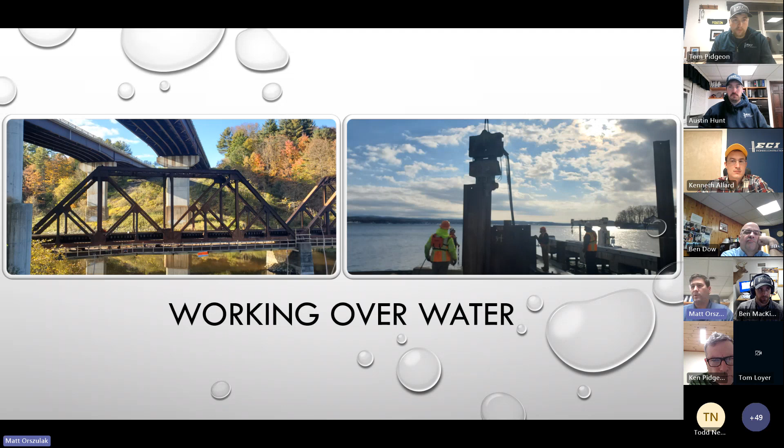So I just wanted to kind of highlight the standard, how we want to tackle that using our best practices and our ECI safety standards. So the biggest thing with working over water, what we're trying to avoid is that drowning hazard. That's one thing that we're definitely worried about, an employee drowning.

So kind of utilizing the hierarchy of controls that we mentioned about earlier, what we want to try to do is isolate people from the hazard. So setting up a guardrail system if we can, or using a personal fall arrest system. If we eliminate the fall, the drowning can't occur. So that's kind of how we want to work from the top down. We want to try to work that way if we can.

If we can't, then really what we need is to wear flotation devices. So if an employee lands in the water, they're going to be risen to the top. So for the winter work, we do have winter flotation jackets, especially for the crew up in Alburgh.

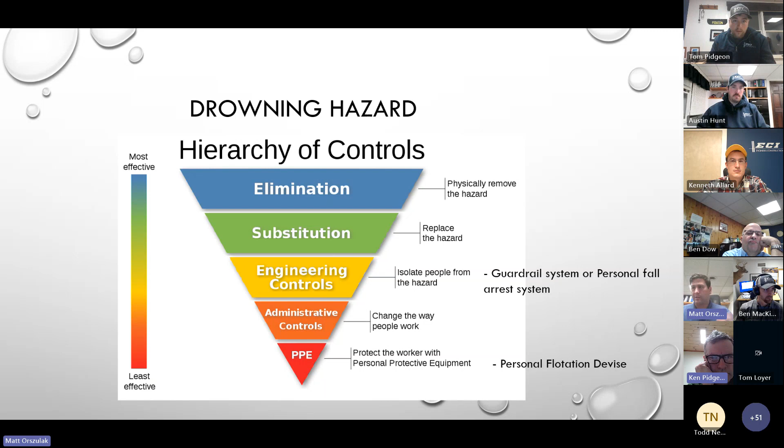They're utilizing those flotation devices. If more crews want to utilize those, please contact Health and Safety. We'll purchase more. So far, we're hearing good positive feedback from these devices. Let us know, and we're staying on top of it between all of our site visits. But that's kind of our standard for how we want to tackle the drowning hazard.

And then the last thing, this is a very quick standard to talk about, is to always have a rescue plan. So the standard says we need to have ring buoys with at least 90 feet of line shall be readily available, and then one life skiff shall be immediately available. So that's if someone does enter the water, how are we safely going to get them out.

Pretty cut and dry, pretty straightforward, but it's a good topic for us because we're doing a lot of this work right now.

Hey Matt, I recall maybe not all the exact details on that OSHA citation, but the guy wasn't really working. He just happened to be at the top of the slope, not even working on the slope itself, I don't believe, but one of those things where OSHA feels compelled to do something, even though it wasn't technically strictly within their regulations. And they didn't even fine us because they obviously didn't feel it was a real violation.

Yeah, but we still did need to be aware of that. Yeah, we spent a lot of energy fighting that one, so if we can avoid those confrontations with them, I think it's best practice if we can.

Yeah, so sometimes my point too is don't even give them the opportunity to appear to be in violation. Just make sure we're on the proper side with the proper PPE and everything, and avoid coming near those red lines, especially if OSHA's on site. Exactly.

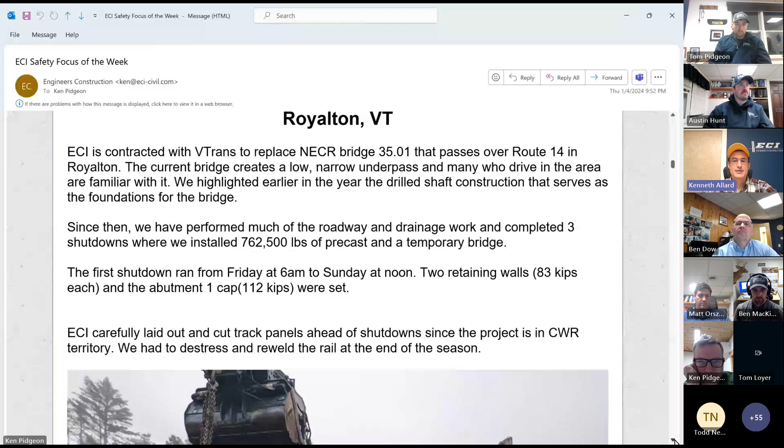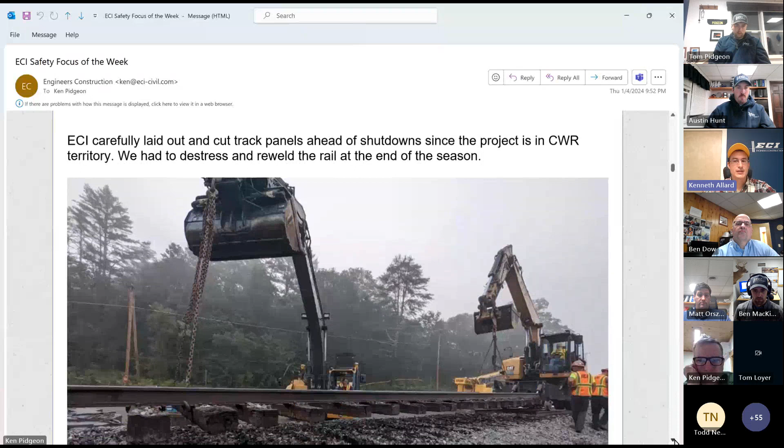We panelized the track. Since it's all CWR, we had to cut it, and when we were all done, de-stress and re-weld it at the end of the season. Here the guys are taking out a track panel for the first shutdown.

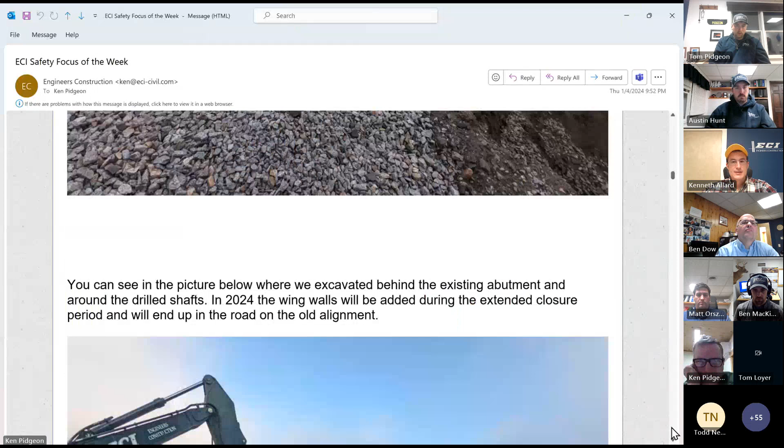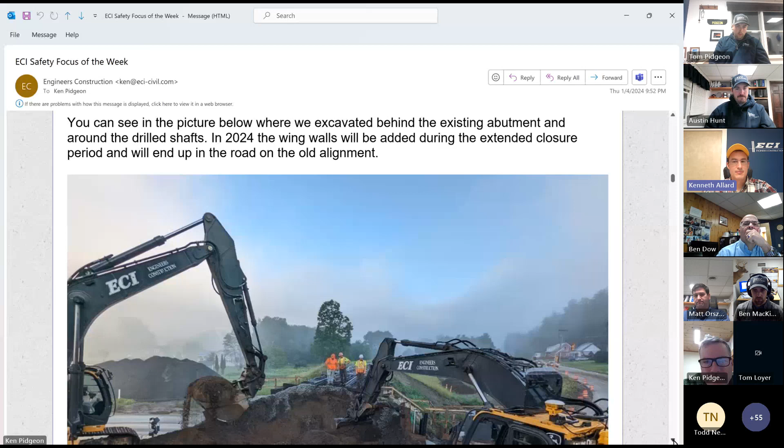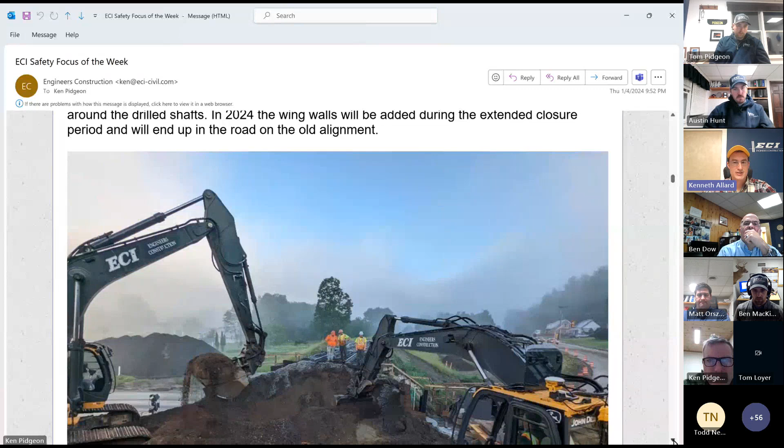The next picture here, we're just excavating behind the existing abutment and around the drilled shafts. In 2023, you'll see how the new abutment looks in these pictures, but in 2024, the rest of the wing walls will end up out in Route 14 where it exists now. So we couldn't do it all this year until the extended closure next year.

This is an incredibly tight S-turn on the existing alignment for the highway, and that's part of the problem there.

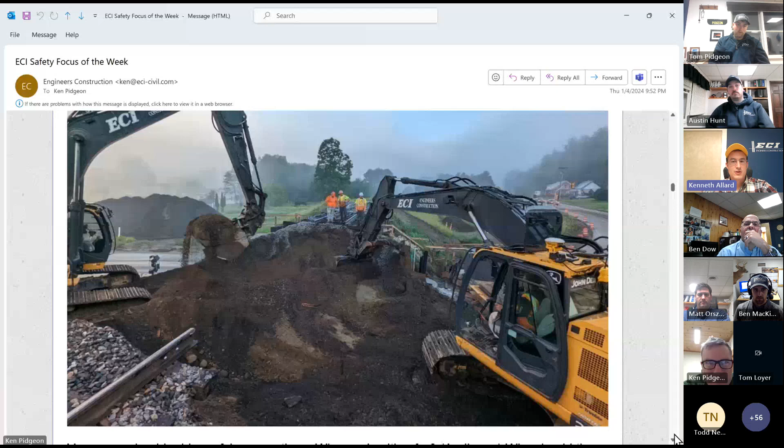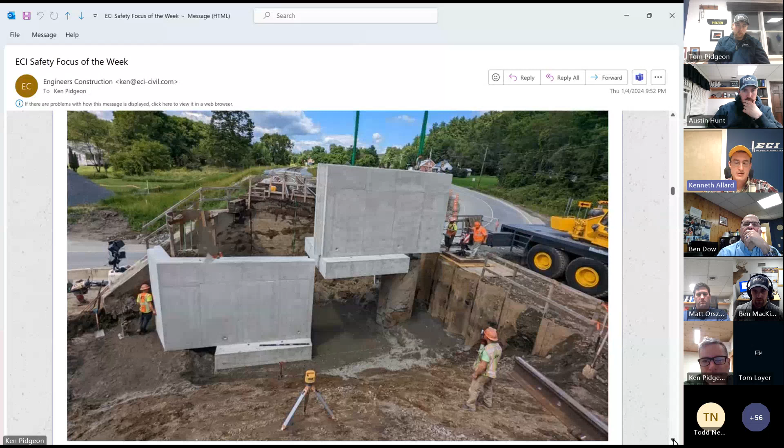The heavy pieces require getting CCS's crane, a 275-ton crane, as close as possible. The sheets on the right in this picture are there to get the crane close, but leave just enough room for the wing wall return. That wing wall in the air there, the footing wraps around the drilled shaft, and there's a return similar to the one on the left that wraps around the drilled shaft. So it's pretty tight. That outrigger pad is supported by 3 H-piles that are hidden, to keep the lateral load off the sheets in the deep section of the cut, which I think is about 10 feet.

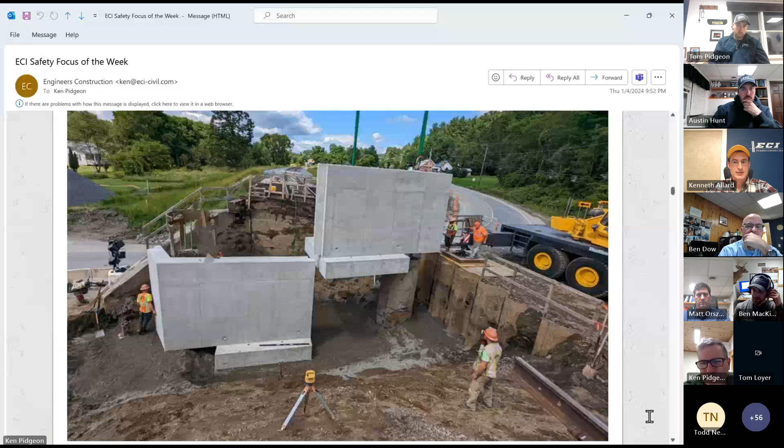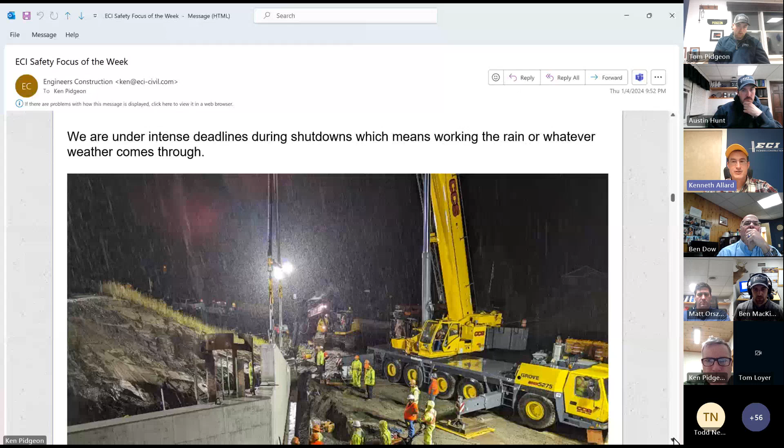Of course, in these shutdowns, we're under some pretty intense deadlines, so we're working rain or shine. Sometimes it rains in the middle of the night, but overall, I think we're lucky.

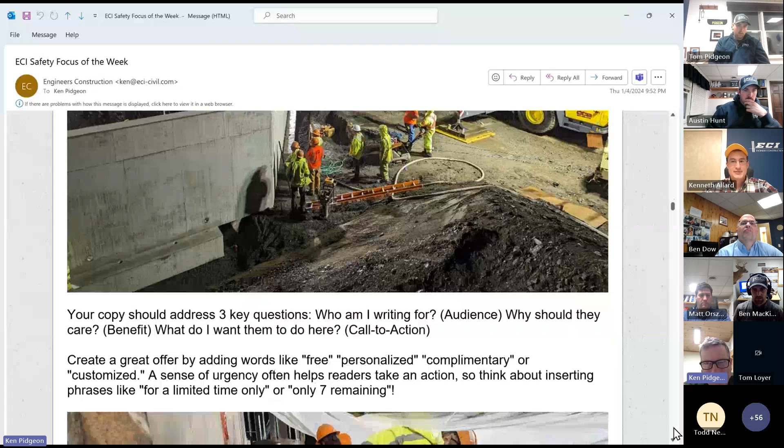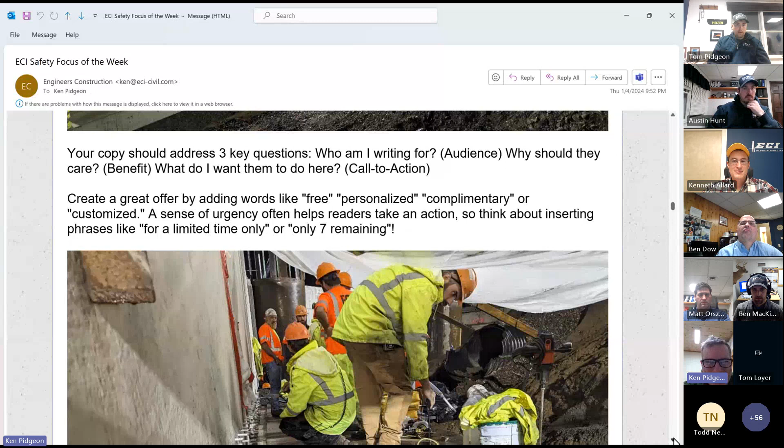This is where we were starting to grout where the wing wall hits the wing wall footing. Those two big pieces came separately, so we tripped the wing wall up, and this is where we're grouting.

And of course it was raining then, so we were trying to keep everything dry.

Some of you guys might be familiar with this system, where you have a retaining wall on a footing. You have to develop tension in the back face bar, number 8 bars in this case, several dozen of them. A standard lap splice length for a number 8 bar might be 4 or 5 feet, but here they've got a little female sleeve, dozens of them, in the base of the wall, with a small dowel in the footing that goes up into it. It's a proprietary system with a special grout pumped in through the ports you see, which develops full tension of the bar. It's a pretty neat system for work like this, but the grouting is critical because that's where all the strength is.

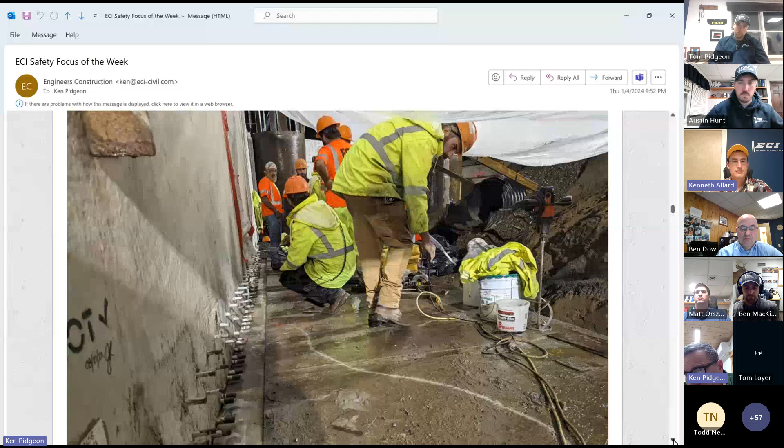Very cool. We were actually waiting for the grout to get strength so we could continue. It took a little longer than expected.

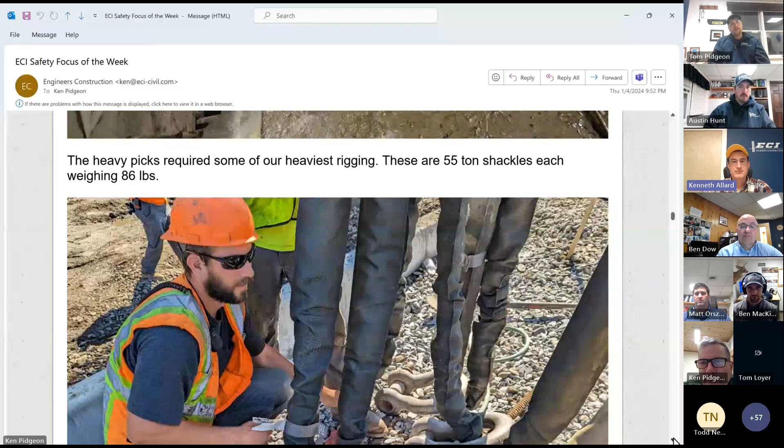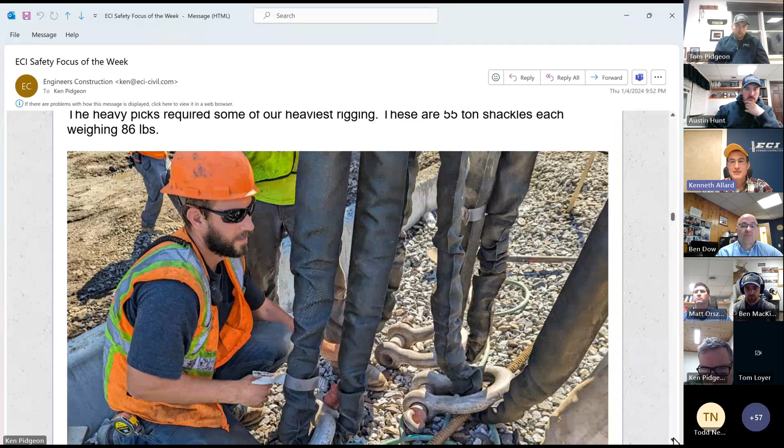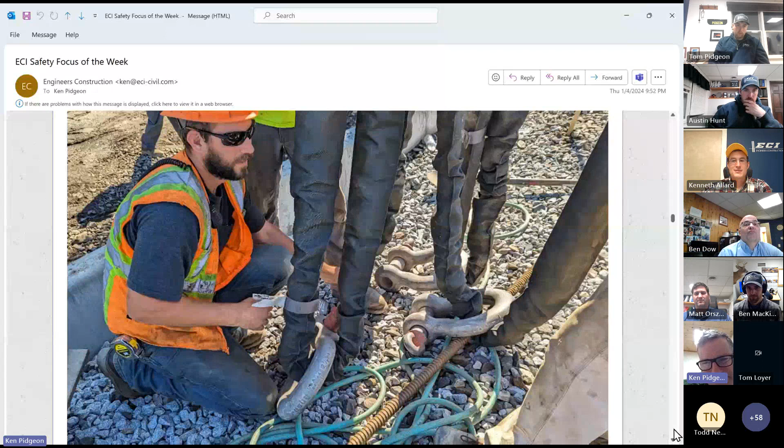These are some heavy picks requiring our heaviest rigging. Here's a picture of Brad in front of some 55-ton shackles, pretty heavy shackles. What's interesting is how light the twin path straps are, synthetic straps. They're high capacity, and you could carry them around on your shoulders really easily. They're just bulky, not heavy. It's a lot nicer than wire rope, that's for sure.

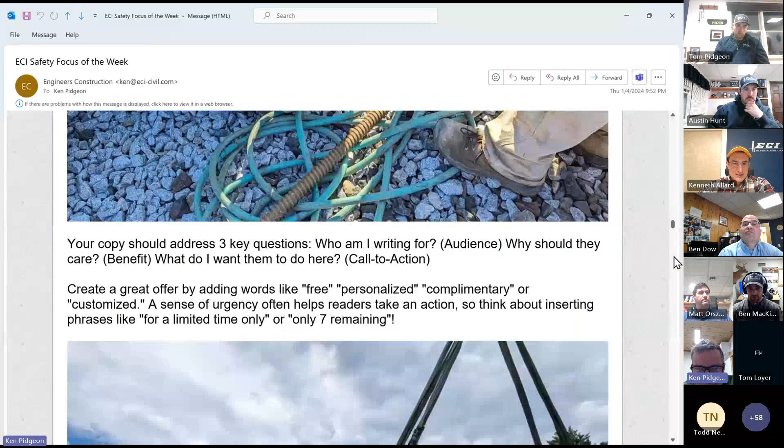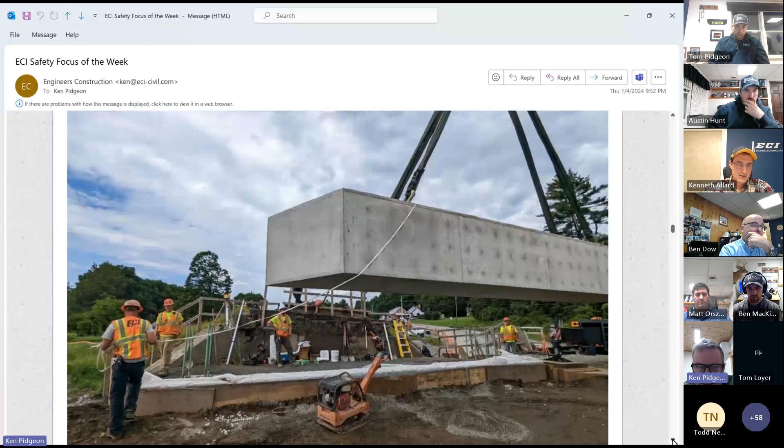Okay, let me get... oh, I had another one that kind of, when I looked through this and checked my draft, it was all changed and a lot of stuff didn't get saved. Constant Contact was acting weird last night, that's for sure.

So after backfilling the retaining walls, the cap was set onto the drilled shafts and grouted. The cap currently sits below the track structure until next year when we excavate it out during the 134-hour railroad shutdown, which also falls in the 20-day roadway shutdown.

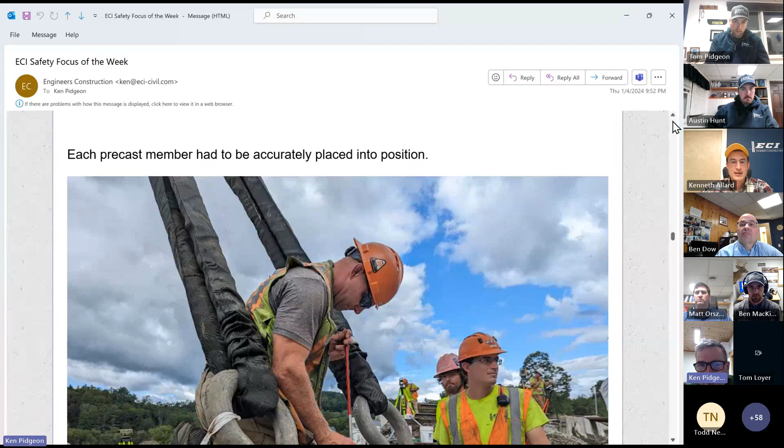Here we are setting the cap on top of the drilled shafts. There were some anchor bolts that stuck up, I think about 3.5 feet into the cap. You can barely see the anchor bolts in that picture.

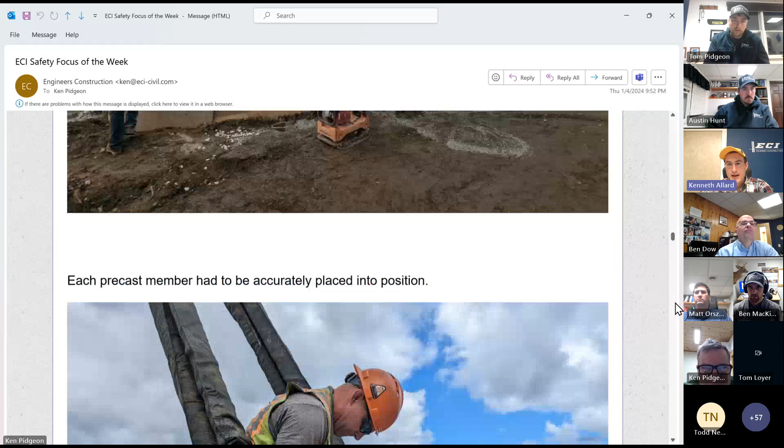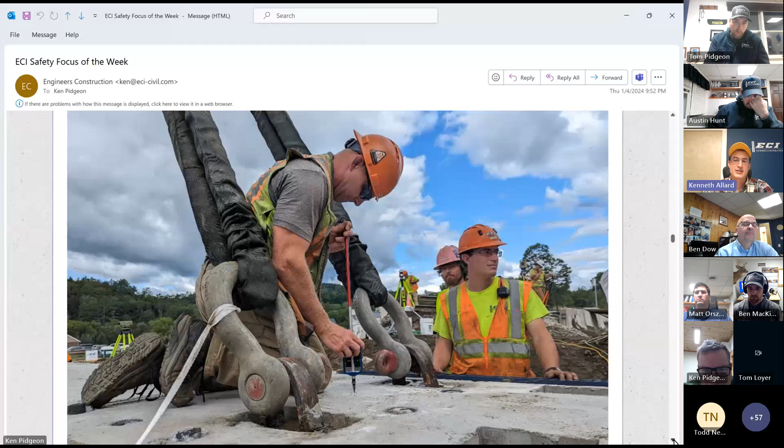And the next one's Gunner. Gunner's doing some layout on the cap as we're setting it, checking as we go, because each piece has to go into a pretty tight tolerance position. This year, not only did we have to land this cap on top of two drilled shafts that were built independently, we have to put the new bridge on both abutments, which are 125 feet away from each other.

And that rigging again, those lifting straps that go into the structure, they were intense.

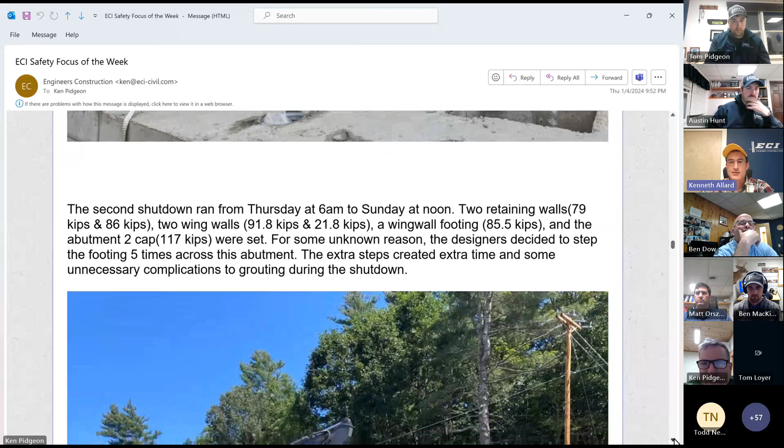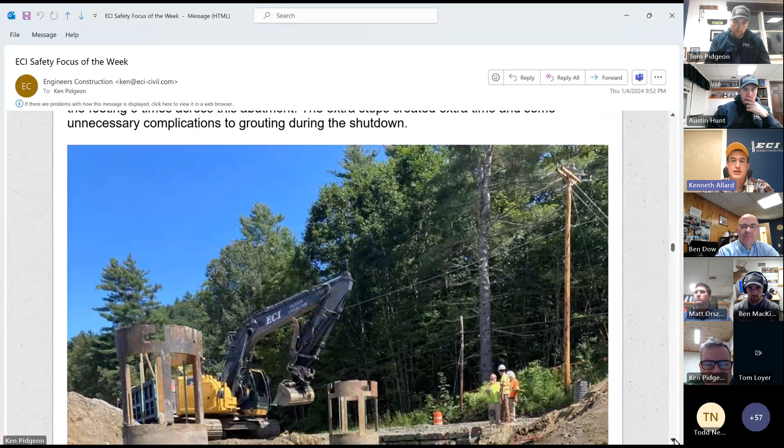The second shutdown ran from Thursday morning to Sunday at noon, so we gained an extra day. There were a couple more pieces: the two retaining walls, which were 79,000 and 86,000 pounds apiece, a couple wing walls, one small one, and then another, similar to the other three, a 91,000 pound wing wall that sets onto that footing we showed grouting a couple minutes ago.

And then the abutment 2 cap was all set during the second shutdown. In this picture you can kind of see it, but for some reason the designers decided to step the footing 5 times across the abutment. It was kind of unnecessary and added some extra time and complications during grouting and the shutdown, but it all worked out.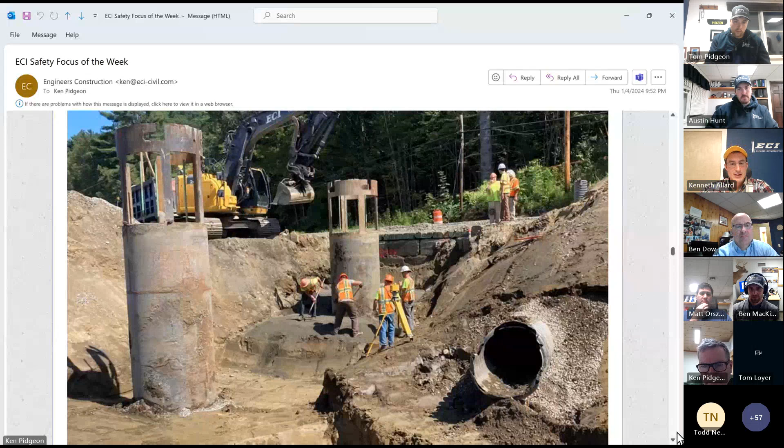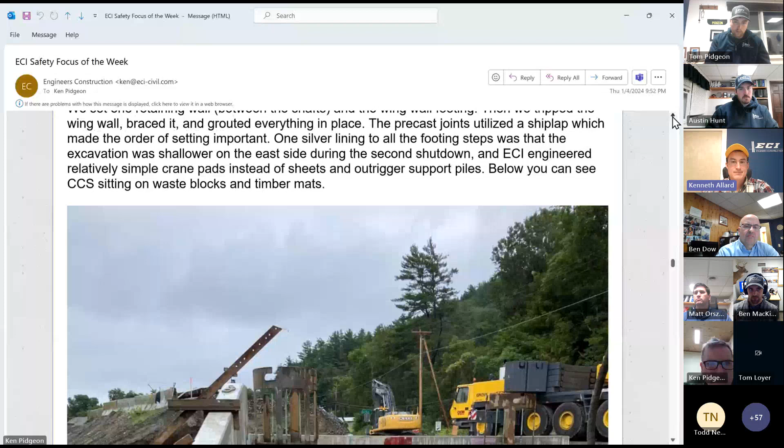So in this next picture, you can see a lot of the precast is already set, but we set one retaining wall between the shafts on the left side and then the wing wall footing. Then we tripped the wing wall, braced it, grouted everything in place, moved the crane around and set the other side.

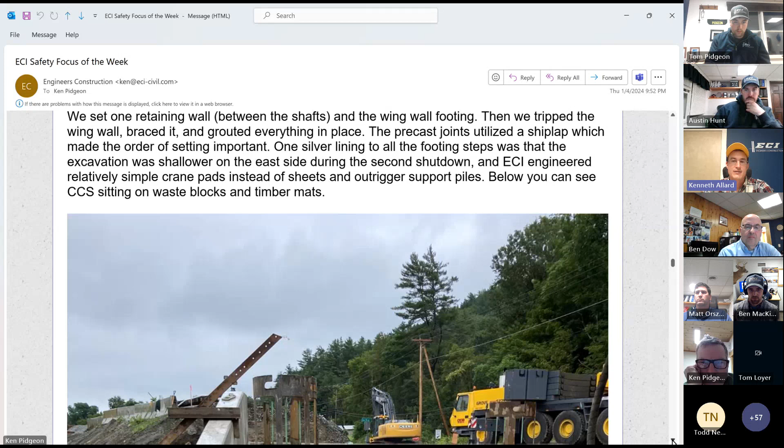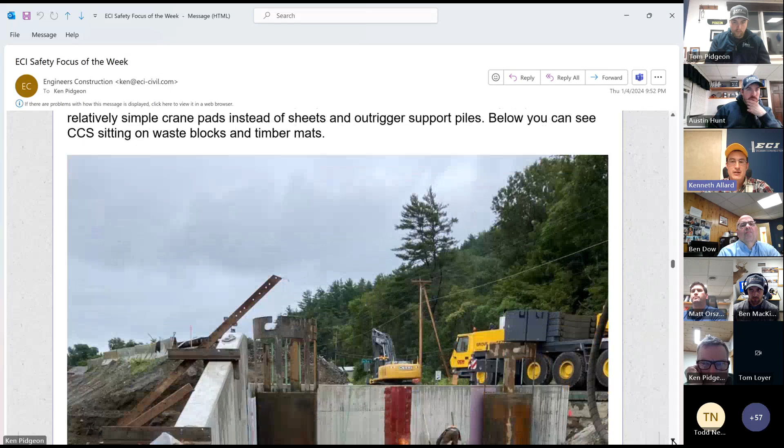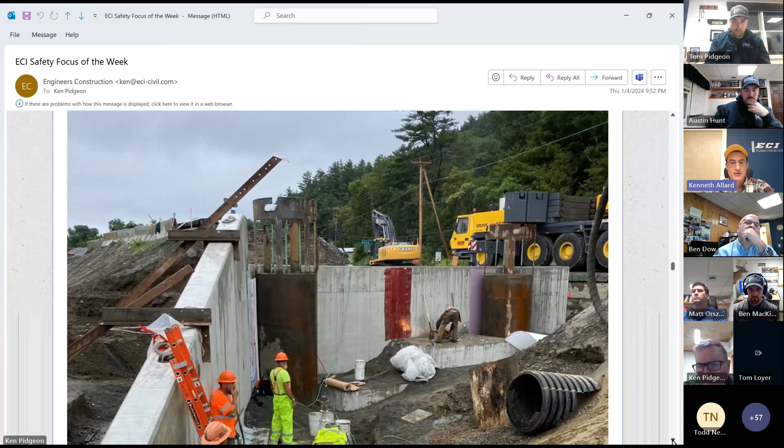One of the silver linings to all those steps was that the excavation was shallower on the east side and required less support of excavation and support of the crane on the other side. We were able to engineer some relatively simple crane pads instead of doing sheets. We did just waste blocks, and you can see the crane sitting on some mats and waste blocks on the other side. You still had to get pretty close. They were still pretty heavy pieces.

So here we are tripping wing wall 4. It's the first one we did, but they call it wing wall 4. It was too tall to ship upright and too heavy to be cast monolithically, so we tripped it. It was pretty gnarly. We thought we kind of figured it out, but we'd never tripped a diagonal piece like this before. So when we first started standing it up, the spreader beam itself was at a wicked angle, and then the rolling blocks started to do their job a little better as we picked it up and everything evened out.

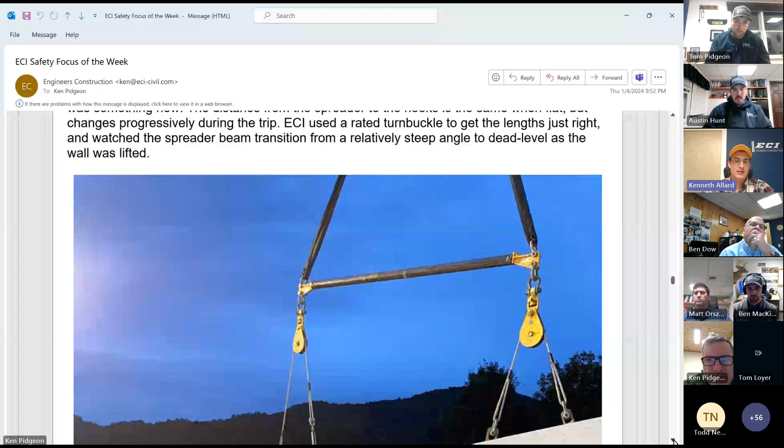We had a rated turnbuckle there. It was pretty heavy duty to get it the right length.

Is that the one we had in house, or did we get a different one for that? I think we bought that one for the job. There's a project photo, an archive photo, where we're lifting with a turnbuckle. Yep, not quite as heavy as this.

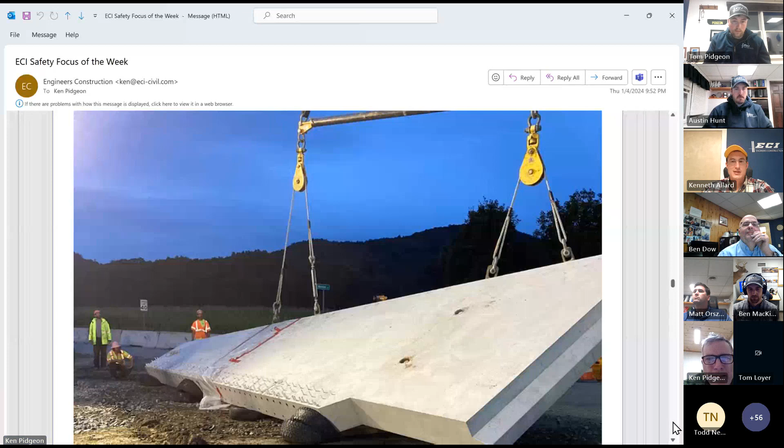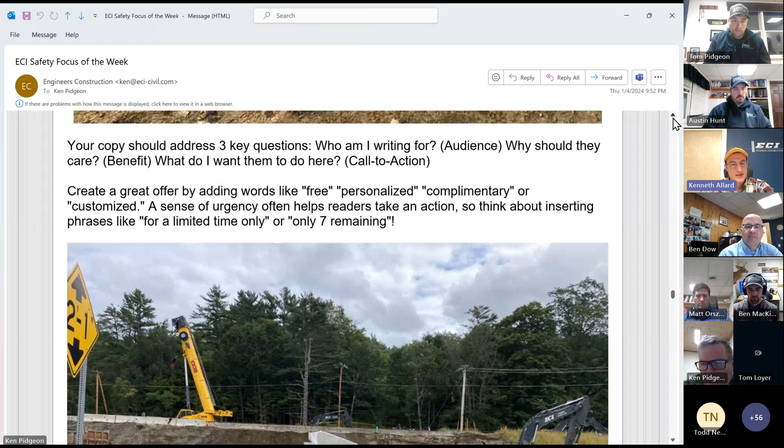So on this next picture, you can see the wing wall sticking out of the embankment. That's what people will see in the future, and of course, eventually they'll see the face of the abutment. Everything to the right will be excavated eventually. That's where the new bridge is going to go, and the new road will end up going through there. And the tracks still have to come up 3 feet from this picture.

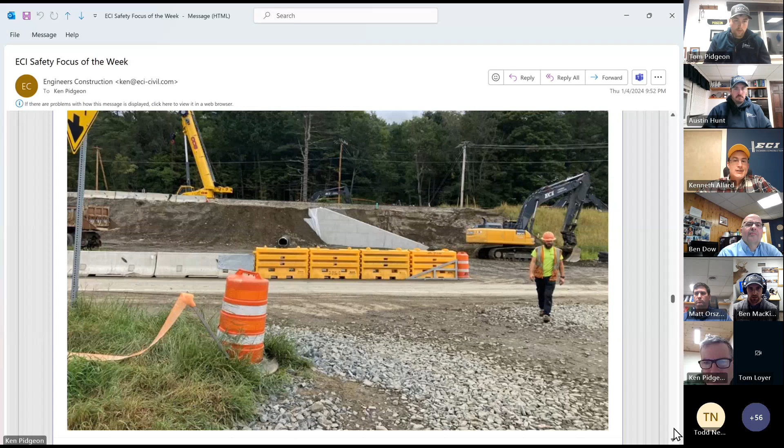So after all that, in the fall, we installed a new temporary ballast deck bridge. While not part of the contract, this extra step allowed us to raise the track to final grade before the extended closure. ECI constructed the new temporary bridge in-house using the SLR bridge 109 as a starting point.

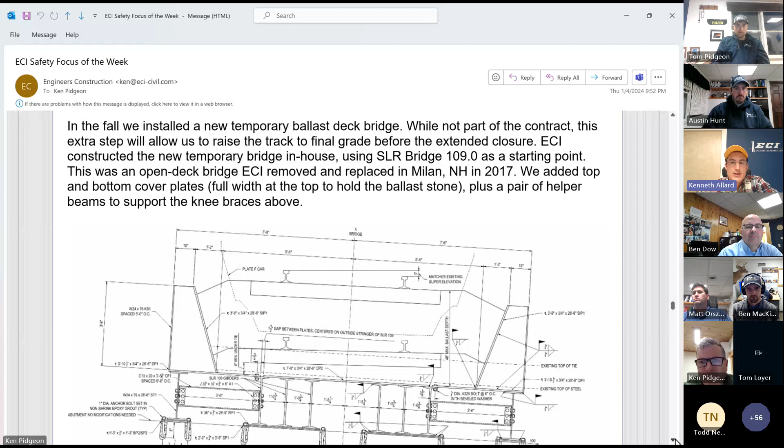That was an open deck bridge that we removed from Milan, New Hampshire in 2017. Then we added top and bottom cover plates. The top one was full width, along with those knee braces and sides that hold the ballast stone in the deck.

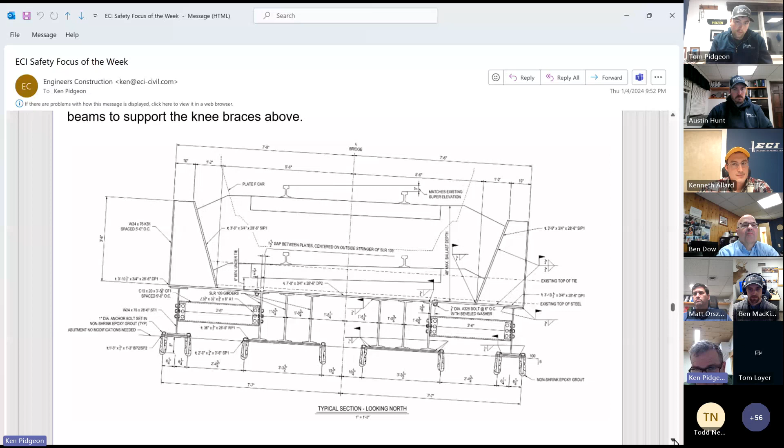The idea there is that we have this ballast deck bridge where we can just surface through and raise the track the 3 feet that we need without constantly raising the bridge up. The initial elevation is shown with the tracks and system, and then the 3 foot raise shows it just barely fits in there with your knee bracing. Pretty cool. It's pretty heavy. Here it is, going in when it's full of ballast.

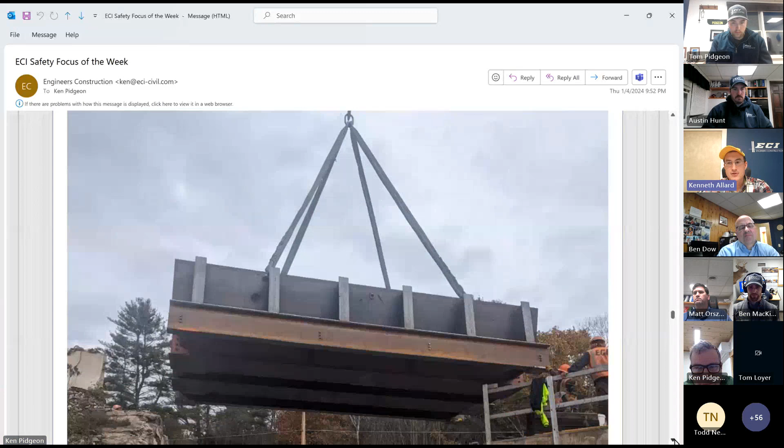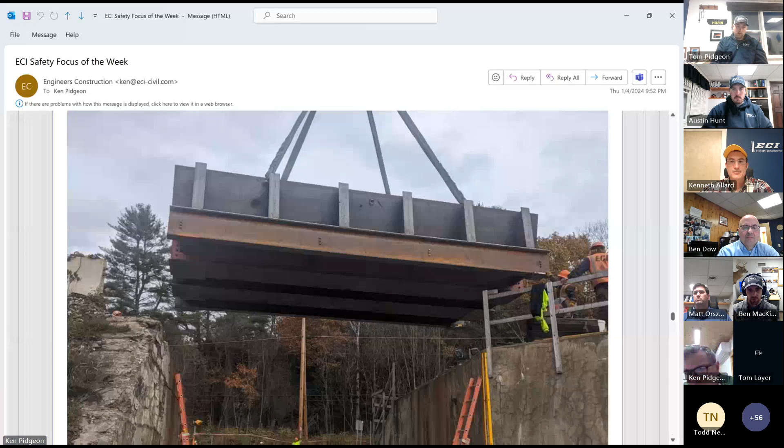Okay, here they are during the little closure that we did, putting the new temporary bridge in. I forget what it weighed when we pulled it out, but the base bridge with the 6 stringers, I think we welded 30,000 additional pounds of steel on it. From memory, I don't remember what the base bridge weighed, but I want to say the whole assembly ended up being 50 or 60,000 pounds without ballast. Then what's that, another 50 ton with ballast, I think. Yeah, got to be, especially when you fill that up.

There it is. We had raised it a little bit from the original in this picture. I forget, maybe we raised it 10 inches. It still has to come up quite a bit.

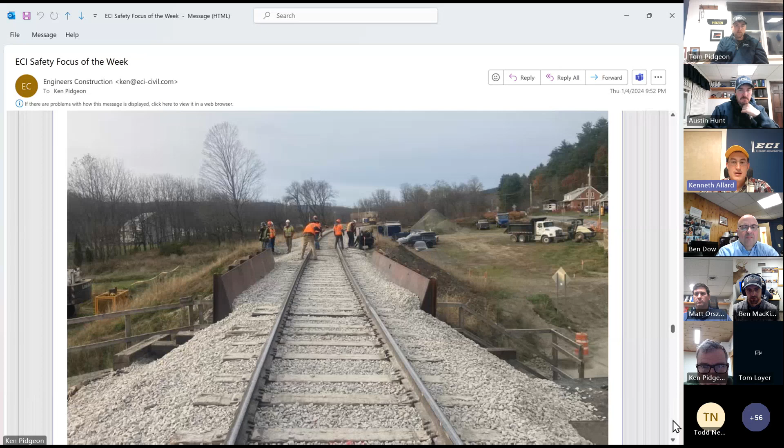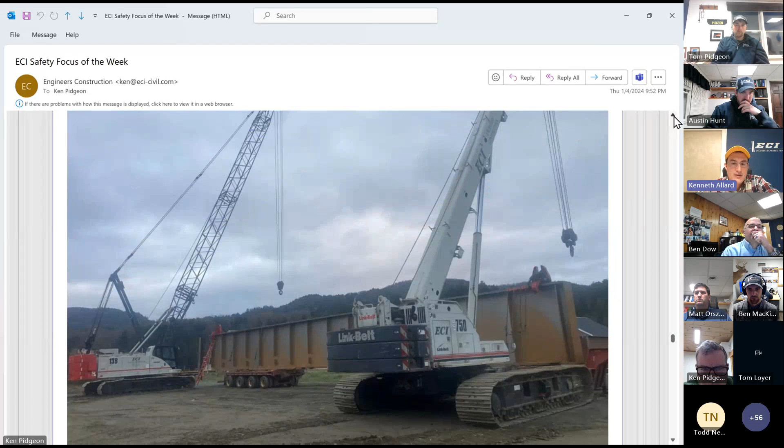Then to finish the year out, we built the new bridge. It's 127 foot long and weighs somewhere around 400,000 pounds. High Steel brought the girders in 4 loads, and ECI spliced them on site. This picture here is just one of, it's not really a half, it's like 2/3 of one of the girders.

So they had a little extension trailer with a 4-axle extension trailer underneath the girder. I forget what they call it, but it's not an extension trailer, it's that little back trailer, end little trolley. Yeah, it's steerable, steerable by remote.

How'd it work out there, pretty good? Were you able to swing the girder, or did you just lift it up? We just lift it up and then boom down to get it to the other side of the trailer, or we lashed it to some H piles we drove into the ground. They were able to roll that trolley out after they set the girder, then just moved it out of the way.

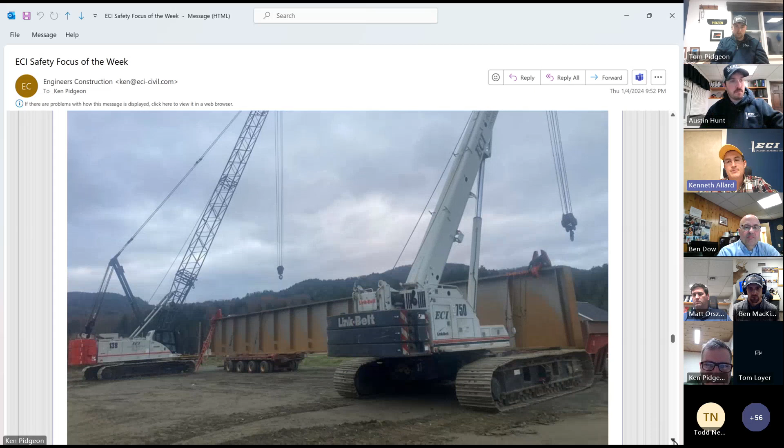Here's Jason on top of the beam, Brad on bottom. They're splicing that together. Each one had 608 bolts, and it was basically a day for each splice.

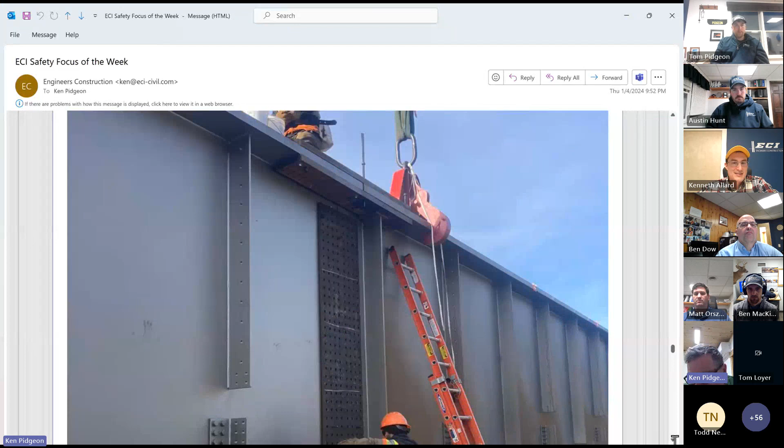It was kind of shiny when it came, but it's rusted now.

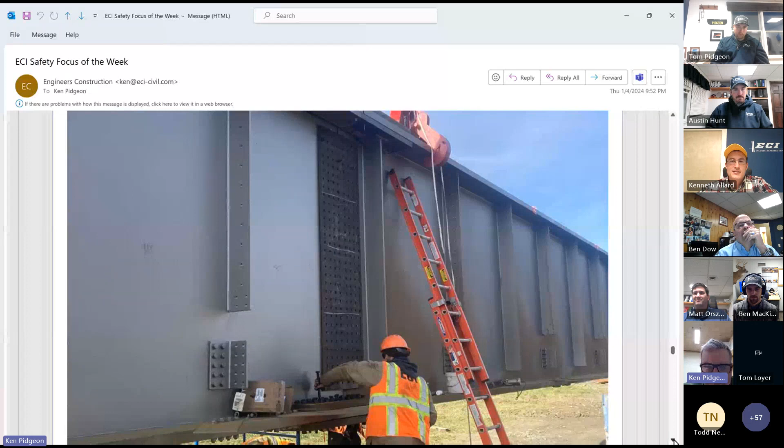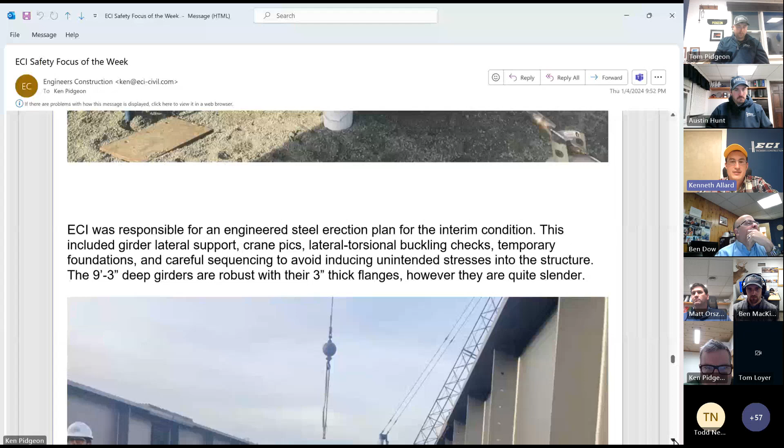Lots of bolts. So we were responsible for the steel erection plan, an engineered steel erection plan for this interim construction condition. This included girder lateral supports, crane picks, lateral torsional buckling checks, temporary foundations, and careful sequencing to avoid inducing unintended stresses in the structure.

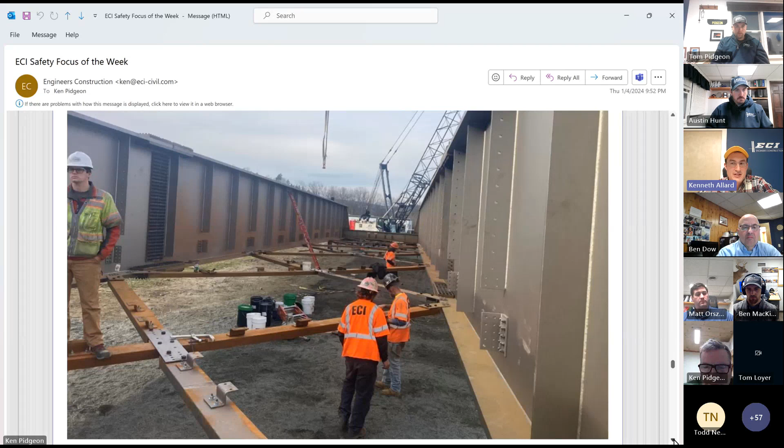Those girders are 9 foot 3 deep, and they're pretty robust. They've got 3-inch thick flanges on them, and so do all the floor beams. Actually, they're pretty beefy.

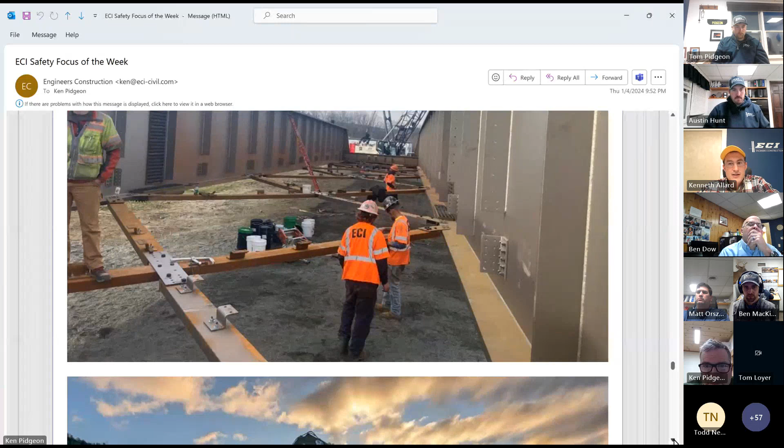Here they are, all the girders are spliced. They're getting the lateral bracing in. Pretty cool. The next picture shows all the bridge steel complete, and the guys are putting the timber on for the deck.

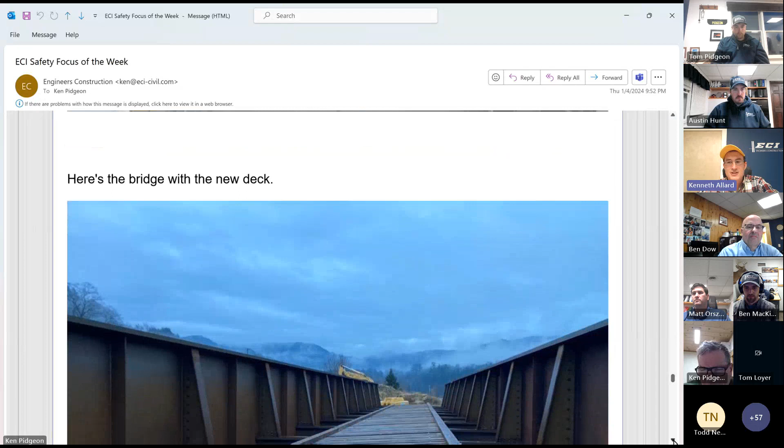So there's some super elevation here, quite a bit. It just shows on the next picture here with the completed deck. Looks pretty sharp. Of course, rail will go on that in the end.

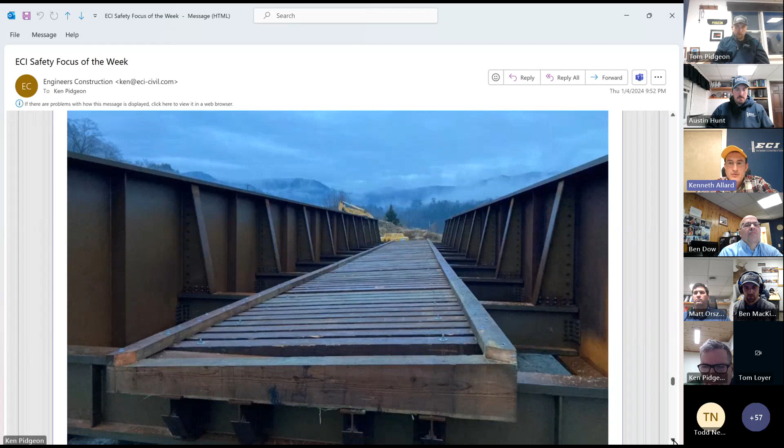We were able to use those extension shields that go on the side of the box instead of double stacking. It made it a lot easier than dealing with more spreaders.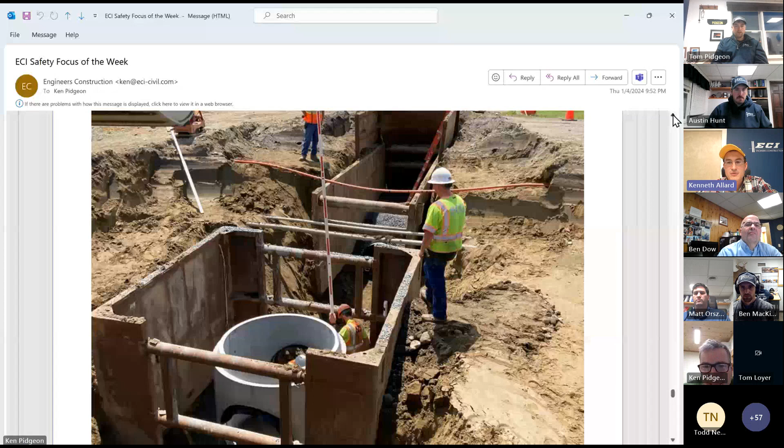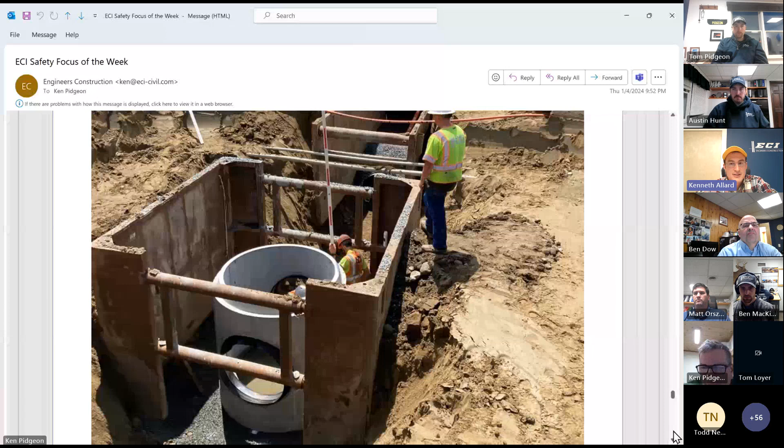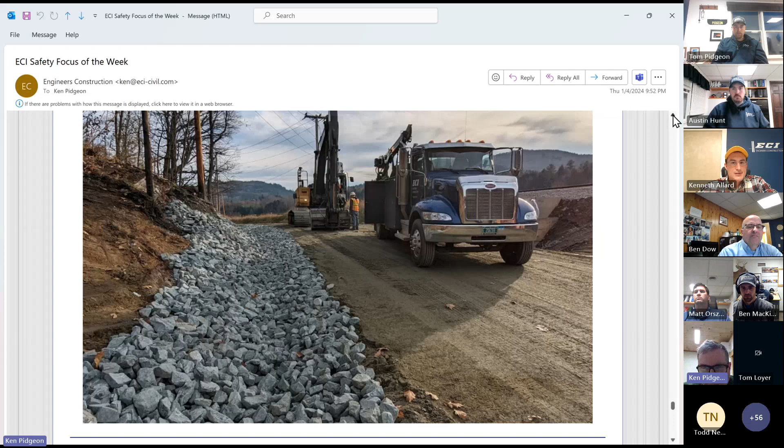Very good project, very cool, very well organized. Lots of cool stuff there, Ken. It was a fun one, great presentation. A lot of work was done this summer over there in fall.

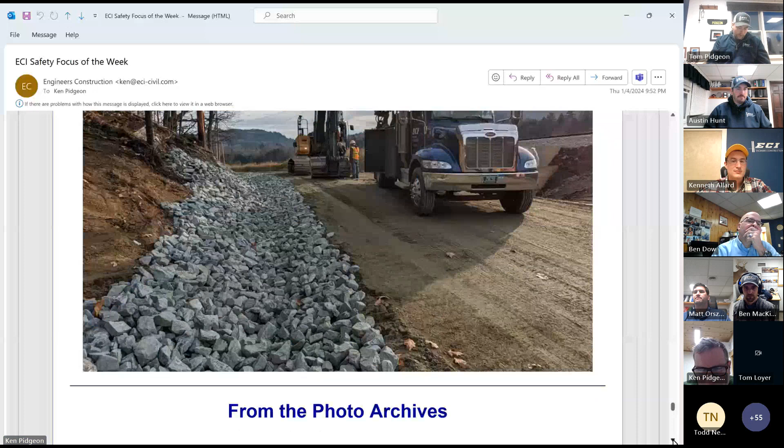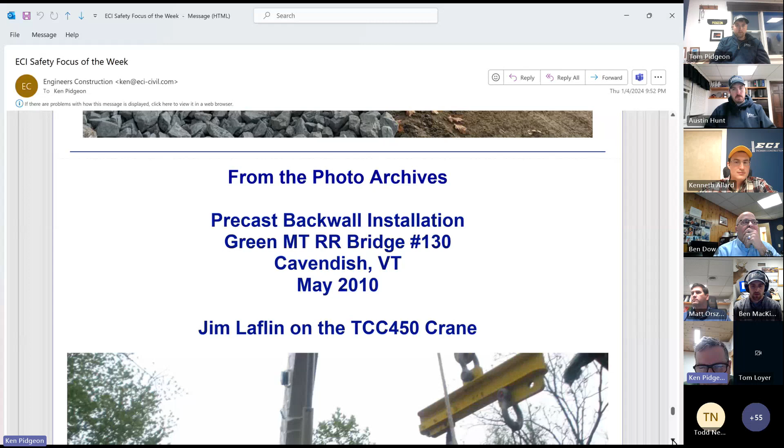So on the photo archives of the week, I have the precast back wall installation for the Green Mountain Railroad Bridge number 130 in Cavendish back in May of 2010, and I have a picture of Jim Laflin in our TCC 450 crane.

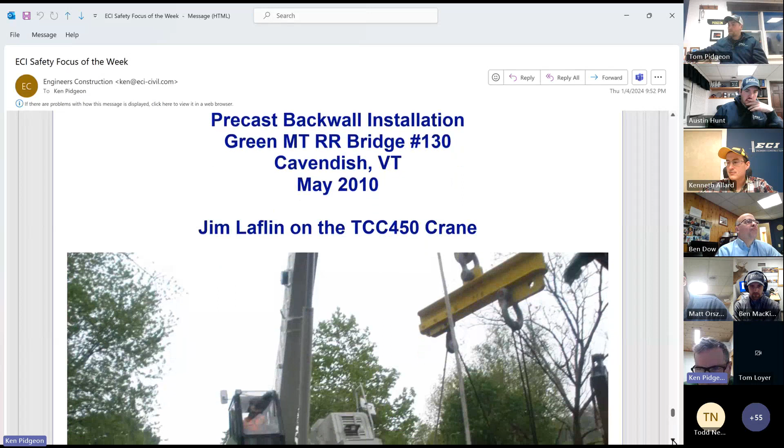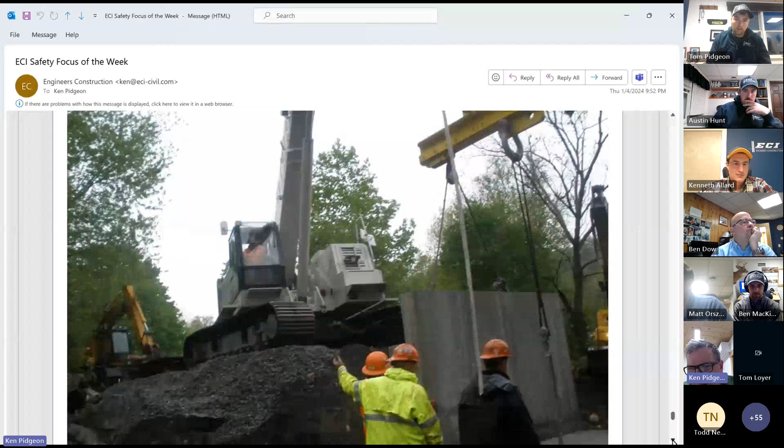There's Jim up there, guys are on the ground. Looks like a rainy shutdown day.

You can see there's a turnbuckle on the front of that L-shaped piece, and the reason we did it that way is just to give it adjustability. We had to install it underneath an existing bridge, a through truss bridge, and this piece was probably one of the outer pieces of 3. So we had kind of careful adjustment to get it in there and have clearance from the rigging against the bridge. So that's what I got.